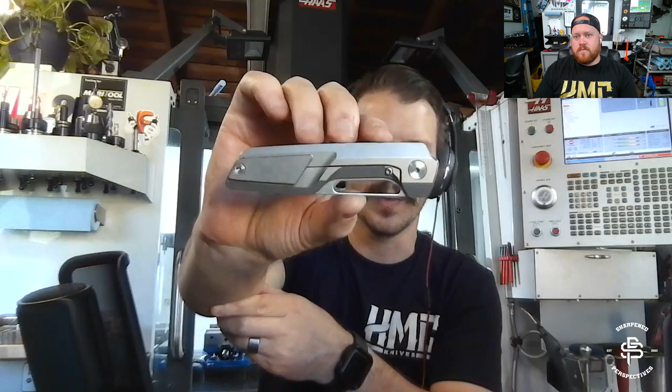Nice, I'm stoked. Yeah, I tried to make it as low profile as possible, but I'm usually wearing jeans, so I tried to leave like an 1/8 inch gap under it, so it's not really spreading on thick pants. So I couldn't get it all the way flush, and it's not contoured at all because I really wanted to make it almost just kind of go away when you look from the side. Obviously you can see that harsh line right there, but most of it just kind of hides.

From each side, it's not super noticeable, but no, it looks sweet, man. I wanted it to be kind of a prominent feature on there. And I've never really been a huge fan of really wide pocket clips, but it's kind of grown on me since I first modeled it. So it's cool. I'm worried that, so I did the inside, the first side of all the pocket clips. I showed you those a while ago.

I did all of the internal stuff on all these. I still need to break them apart, but I ended up putting a chamfer all the way around it. You can see it in the photos that I posted, but I put a nice heavy chamfer around all the edges, so it's real soft. But then I remembered how stiff these pocket clips are, at least on these Bestech ones. So I need to make them really thin. And so now your chamfer's too big on the back, and you're going to have a knife edge between the two? That, or I have to just make a really small edge break on the outside, which isn't a huge deal.

Because it's modeled only at like 10 thou anyways, 10 or 15, so it's pretty small. But when you have this wall thickness right here of only 30, 40 thou, and there's a 15 thou edge break on both sides, you're not going to have that much. So I could relief the center of it and do just a small relief in the middle. I don't want to set up the inside again, but I might need to do that so I can still keep it somewhat thick. Yeah, chamfer everything and then do a relief inside. So it's not all the way through.

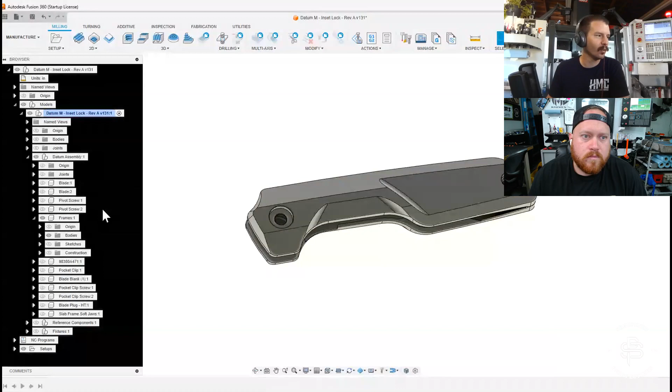See if this opens up. For whatever reason, Fusion, the whole left side, it's completely white. The screen on my end is completely white, but it leaves this big black section on here. And it only is when the text is there, like when the tree's showing. So it's kind of strange, weird.

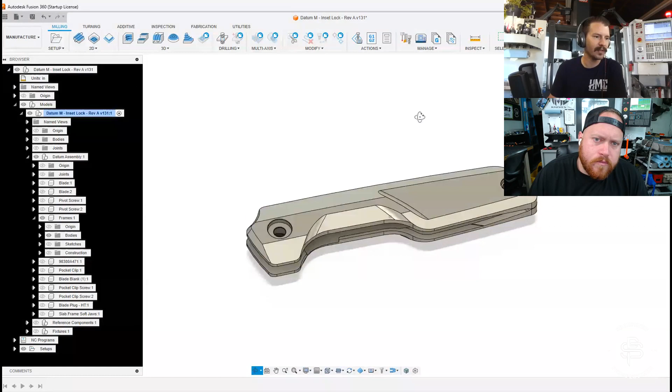Yeah, so I'll just open this up and show this is the top. See some better light. So yeah, the frame design stuff is all done. So I've finished up all of this geometry in here. Getting the pencil toolpath to work on this surface all the way through was a nightmare. So the first one that I ran, I got it to work really well.

And then I restarted Fusion because that authentication shit's going on. So every time my computer goes to sleep, I got to re-log in and everything. And for whatever reason, I had to regenerate all my toolpaths and it wouldn't follow this toolpath. It wouldn't follow this fillet. So I literally spent like 2 hours messing with the damn settings on here.

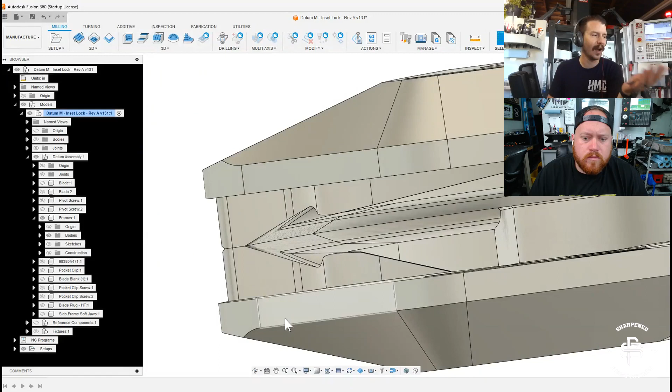With the pencil toolpath, I had to modify the model a little bit. I had to modify all the settings, and I finally got it to work. That wasn't what I wanted. I finally got it to work pretty well, and I have so much going on here. So the pencil, I had to do like a big lead in, lead out. So pencil, I'm trying to think.

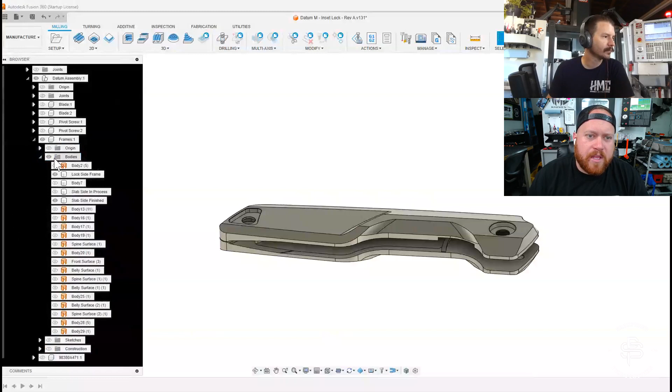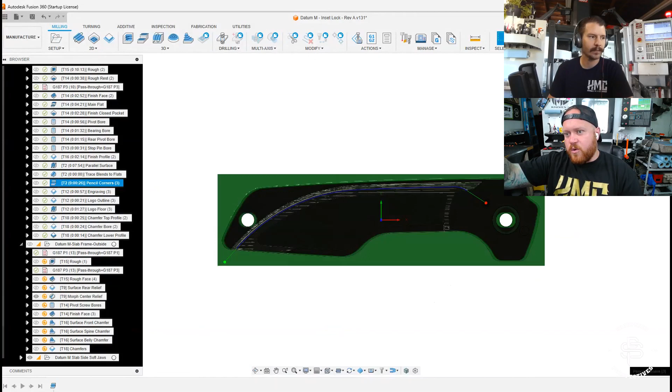For this you're fine, man. Pencil, if I'm thinking about it, I'm assuming that's something similar to what Creo considers a cut line, where it has a 3D surface and you want to surface up and down it, but following the trajectory of that surface around a shape. So it'll start at one end, follow what you're cutting, but step over equally and incrementally around the entire thing that you have selected. Is that how that functions?

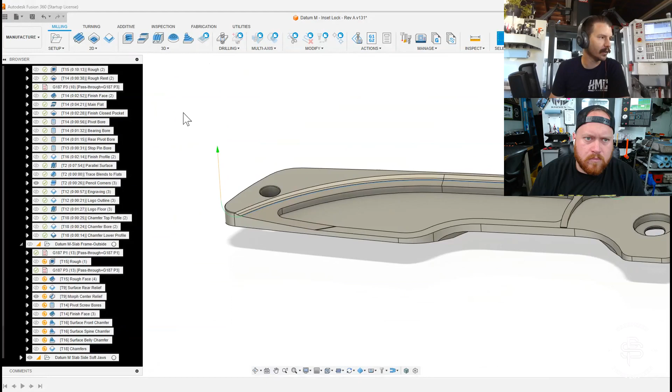Yeah, kind of. So I have this modeled with a 16th radius, and pencil, if you use like an 1/8 ball with the 16th radius, it goes in there and it follows that modeled radius exactly. So before this, I'm doing a parallel toolpath on this to finish everything. The parallel toolpath basically finishes all of this stuff. But when you get to sections like this, where it's going up and down a steeper surface, none of this is steep. There's a waterfall line right there.

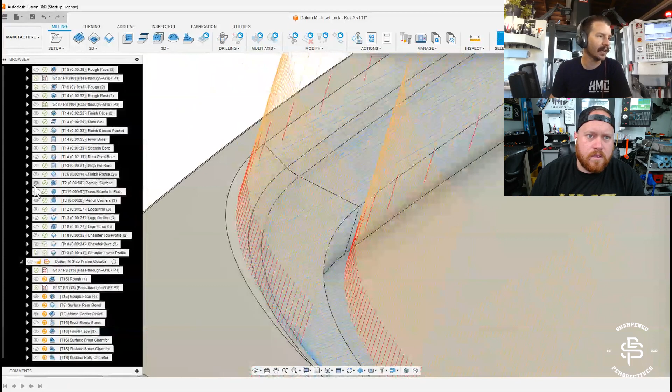You can see. Yeah. So pencil comes back in and it just follows that radius, this blue line. It basically just cuts off all of those little waterfall lines, and you still have all the parallel on the other surfaces, but it breaks up that intersection right there. So it basically just follows right in that corner and cleans and crisps all that feature up. So that's not what I was thinking.

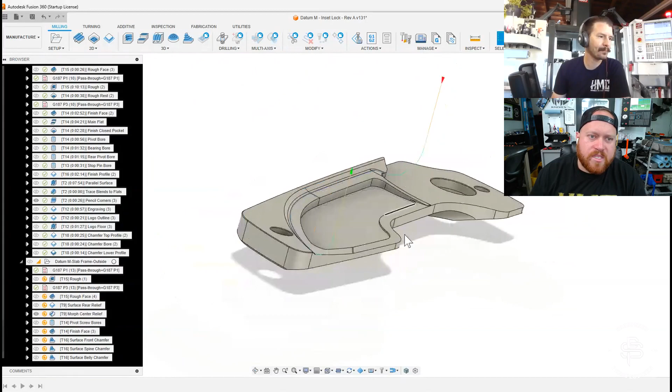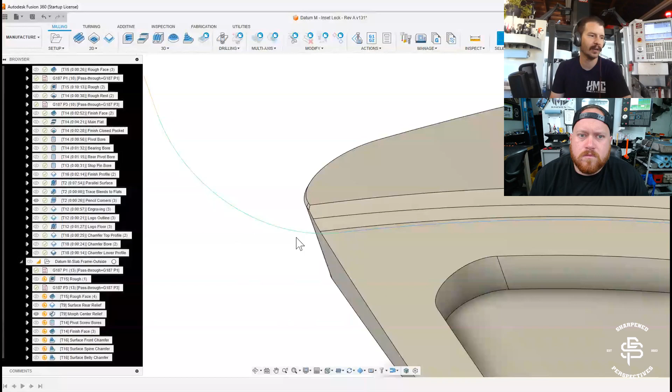Yes, but for whatever reason, it didn't matter how much I changed the model, how much I changed the settings. I don't know the reason why it wouldn't do it. The very first one that I did, it worked perfect. This one didn't. It kept cutting short. So I had to put a big lead out on this to get most of the rest of it right there in that little corner where the green is. So there's like a 250 thou lead out, and it still is kind of missing some of it. Just at the very end. Yeah, you can see there's a little triangle right there.

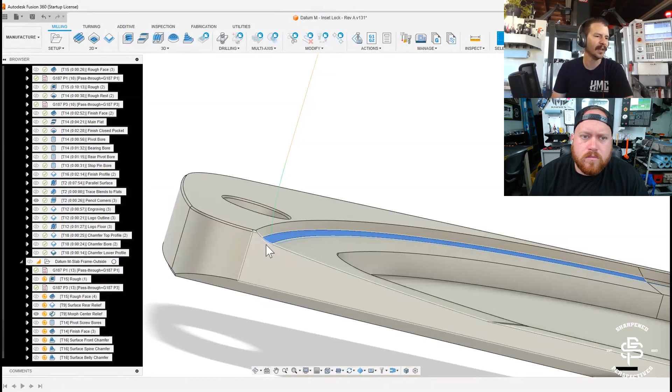Yeah, but the nice thing though too is that this has already been surfaced from the parallel. So it is already getting all that stuff. It just didn't get this specific radius all the way out. But at this scale, the scale is so small, you're never really going to see it, especially once it's all blasted, and it's on the inside too. So I'm obsessing over a lot of these little details that I think most probably aren't going to notice. But again, I kind of want to come out swinging with all this stuff.

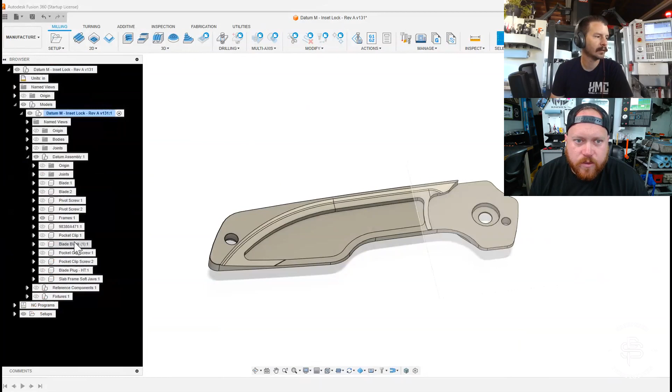100%, man. Yeah, the pencil would be considered a trajectory toolpath for what Creo does. Just follows a contour. It can move up and down in Z while following an XY trajectory. Nice. Yeah, that's efficient for sure. Yeah, it works out well.

And then this is the lock side. Most of these toolpaths are all red because they're from the old models. I killed a lot of the old model stuff.

So this side too, I try to pack as much detail in here. Some of this geometry right here, where this surface comes all the way out on the other side that you could see. I guess I'll just open this thing back up. I keep closing all this to try and minimize some of this stuff. But yeah, if you look inside here, some of this surface comes all the way across. This was a detail that was inside the integral knife.

I don't know how much this is going to zoom in on this. I think it will, but because it's screen sharing, it might prioritize the screen share. But anyways, I'm going to try and bring one of these with me too.

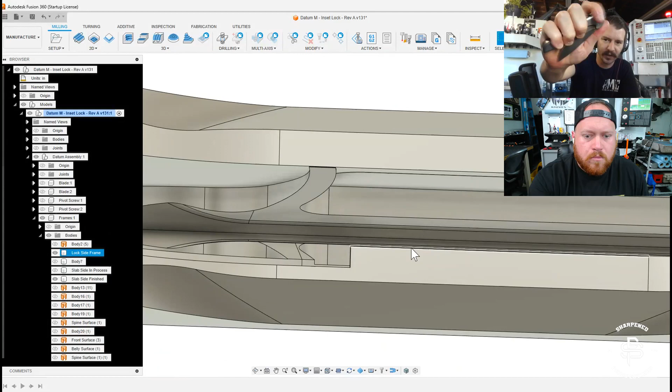This was the original knife that had, where's the camera? That had all of this stuff kind of closed up. This blade wasn't for this frame, so it doesn't actually close all the way yet, but I'm going to try and finish fitting everything. But this was the original integral knife that was TIG welded shut, and it has all of these same features in here. I basically just took this apart and kind of tried to remember how I modeled all this stuff, but there's an integrated over travel stop in this.

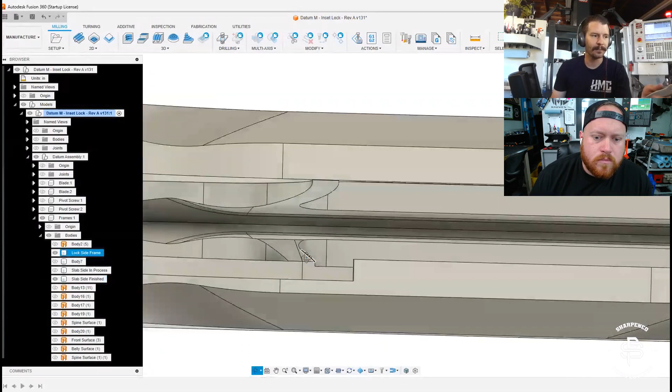Which is actually this surfaced area on the lock side. It comes across, and then once the lock bar is cut through, I key cut the inside of this. So this surface actually overhangs the lock bar, and it's an integrated over travel stop. So obviously you can't bend the lock bar out too far because there's material that's overhanging the lock bar from this surface. Sure.

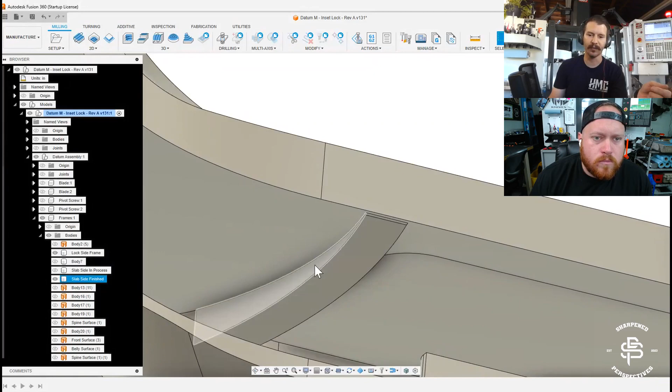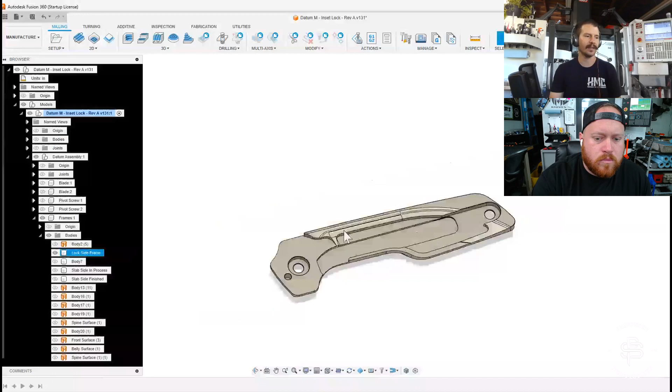But looking inside this knife when it's open, it's kind of a cool feature. It looks nice. So I ended up adding it on here. I got to fine tune this surface a little bit. I just basically threw a big chamfer on there so that it's not just a square corner there. So the lock side is pretty much the pocket. I added this pocket. This whole thing is a mirror from the slab side. I modeled this first, and then I just deleted the lock bar.

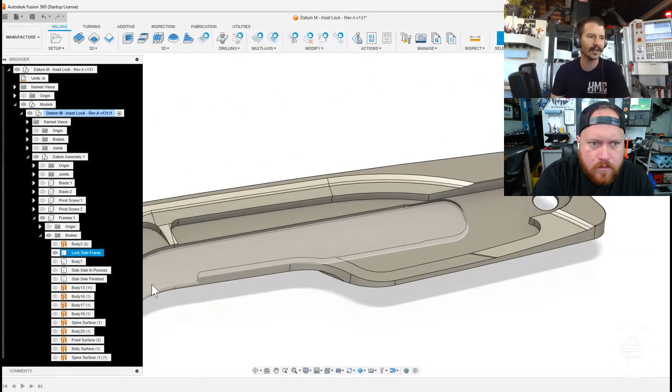So the pivot pin in the back that's going to hold the pocket clip in place, or the pivot barrel, is what's going to hold this lock bar in place. And then location is going to be just tight in this pocket, and then tight in the pocket back here up until about 2.5 inches or so from the end of it, and then it's going to just get 5 or 10 thou thinner. So there's relief all around the rest of it. But I added this little dovetail in here.

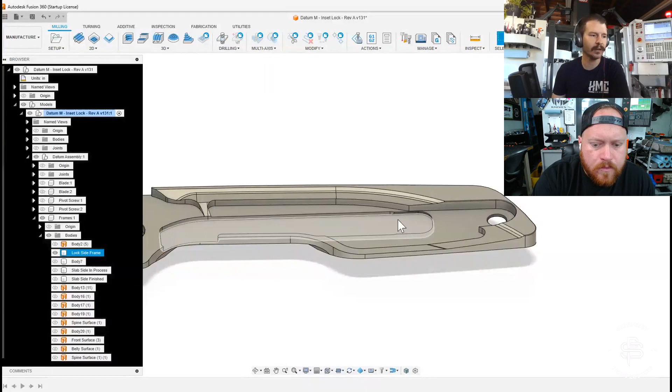Because I was talking about, I need it to actually kind of retain the lock bar where the lock relief is. I think this is going to be too far for that, even though the pressure from the bend and everything is going to be pushing the lock bar down into this pocket. I still want to try and keep it somewhat rigid in there. So I put this dovetail in here.

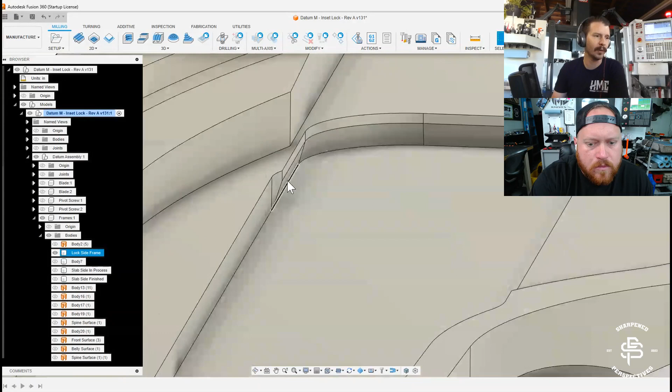I modeled it at 32 degrees included because that's what I have in the mill right now for doing iron sights or backup sights on like Glock slides. And it's the only one that I have that'll fit in here. I want to try to not make it too tight. I know if I made this shallower, it would probably hold it a little bit better than this really steep one. But again, it's what I got in there, and I'm just going to use what I have. I might actually end up just wiping it out if I can't get the lock bar in.

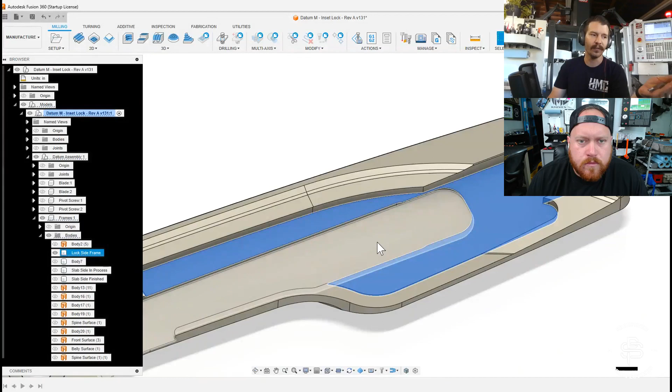So I need to basically install the lock bar by pressing down on it in this area here, where the mouse is, somewhere in this flat area, and then force the lock bar down to where it essentially snaps into this dovetail and then pushes back. So the fit doesn't have to be super tight because it's actually going to spring down away from it. But it should still hold it in place pretty well. And it's at least going to keep it from coming up. So we'll see how it works. I might have to put this back in some jaws and cut it out if I can't get the lock bar in, but that's the plan for now.

I still need to model the actual inset lock, but it also kind of targets the area where you want the bend to be, rather than just letting it bend however it wants from where it's bolted into the knife and retained back where the backspacer is. You've effectively moved the bend point forward probably 3/4 of an inch or something. Yeah, that's exactly what it is, to a more targeted place, like where people like to have that lock.

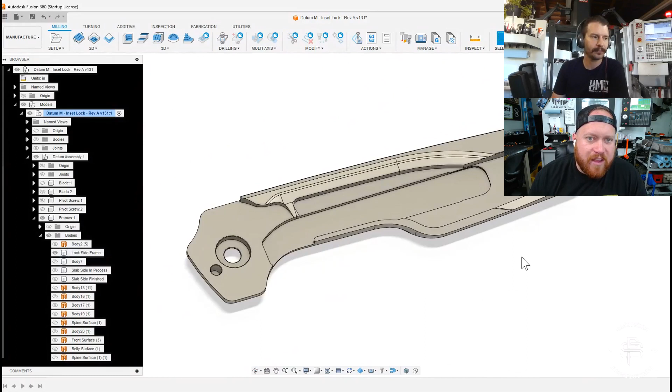I was kind of concerned about that, because if you have that sandwich back there, that's probably like a 3.5-inch lock bar. It's far from where the bend point would be up to the lock. And you never know. I think it would make the lock pretty spongy. You know what I mean? That's what I'd be worried about. Yeah, it's 3.65. Yeah, see, I wasn't too far off on the digital eyeball.

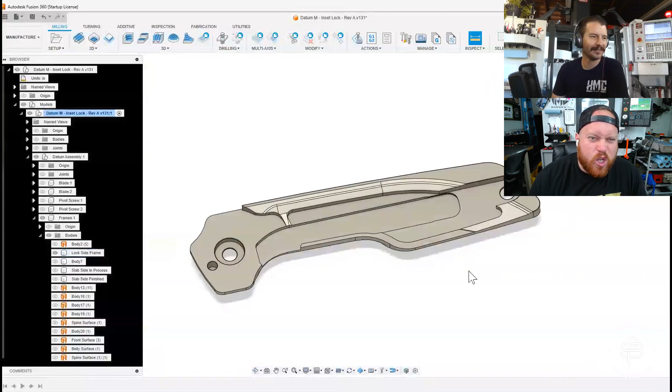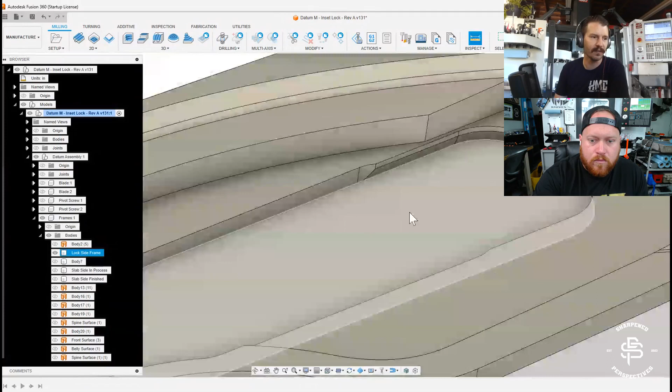But yeah, I think that is a great move. And as long as it's reasonably machinable, I think that'll work really well. This part should be real easy. It's all just from the top, so I'm going to hit it all from the first side, and then the dovetail tool is just going to come in. I just want to make sure the dovetail tool doesn't touch this floor at all, because they usually leave kind of a shitty finish.

This one from AB Tool should actually cut on center, because I cut the dovetails with it and I finished the floor. I'll just have to do a vertical lead in so it doesn't gouge the floor when it plunges. Or I can just run it a thou high and plan for that. So that's the plan for this. That's actually next after I finish doing these.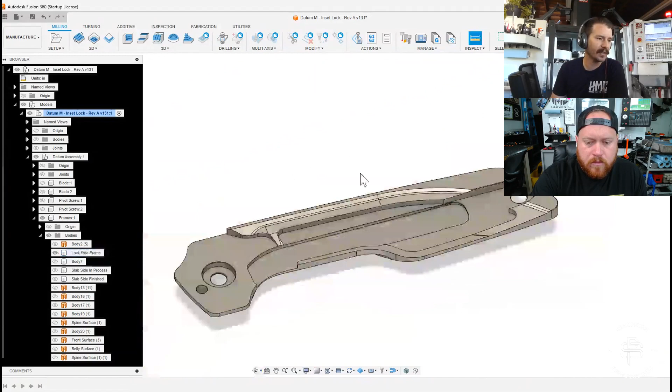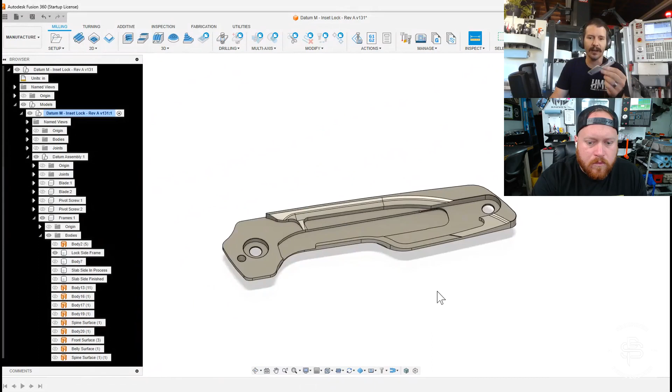I might actually jump to the internal side of this before I even finish all the outside stuff, because I can still sandwich everything together even if I do the blades. But yeah, we'll see. I've got to figure out what I'm going to do next. Since most of this stuff is actually done on the outside, I might just dial in this toolpath today while the mill's running, and then run out all the external stuff while I program the internal stuff. This setup's already done. All these tools are already in. It's the same jaws for the first side, just down on talons. So I'm probably going to do that.

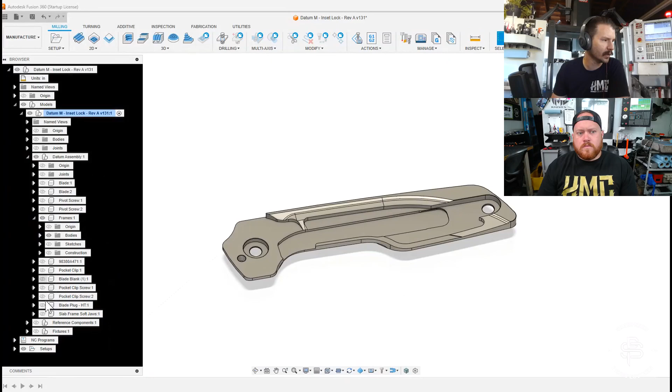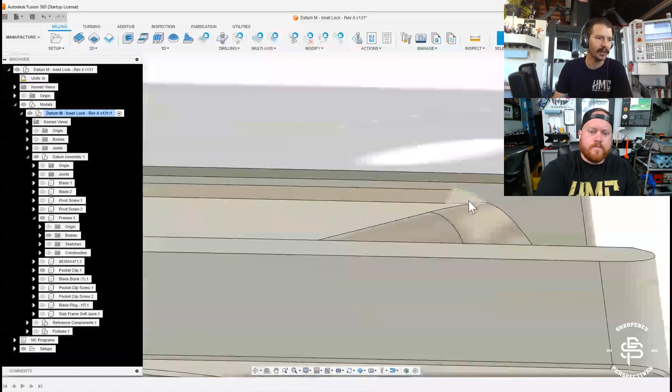We were talking about checking pocket clip stuff. Right now I have this modeled. 40 thou is what it's modeled at right now. So some of my sweeps are gone. It just got rid of some of the sweep in the model. It's supposed to sweep out like this. Luckily, it's already cut. I've got to check and see why. I don't know what's going on. There's stuff in here where I'm literally not even touching it.

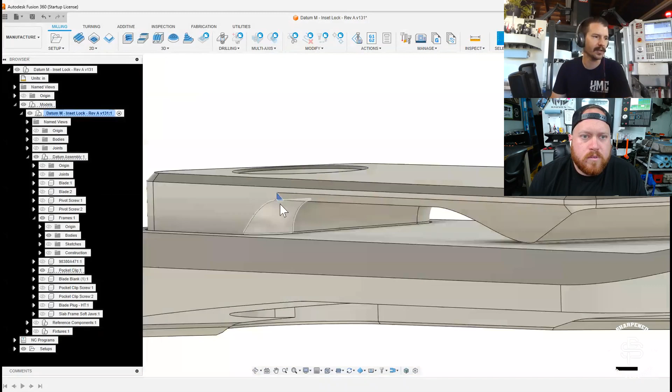There have been so many updates recently where it's crapping out imported models if I bring anything in and it's linked, even though nothing on this is linked. I've got to see why it's doing that. I'm in the manufacturing space, so I won't do anything. But anyways, that's pretty much what it's going to be like. I still need to model the inset lock too.

But yeah, we really only have a little over 2 weeks, because I'm leaving on the 16th at 6:45 in the morning. And I want to try to not be working late out here on the 15th. Don't worry, you will be.

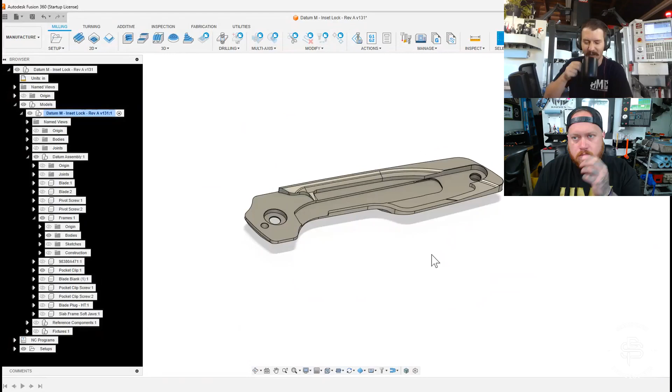I probably will be. My buddy PJ hit me up yesterday. He's like, "Hey, if you want to borrow any of my sharpening stuff, let me know. You don't have to buy any of that right now," because I literally have nothing to sharpen knives right now. All my stuff is dull. The pocket knife I've been carrying since I made it, I've never sharpened it. Jeez. Gotta step into being a real knife maker. Yeah.

So yeah, it's gonna be tight. I think you're figuring out the most complicated aspects now. Better to be doing that on the front end, for sure, rather than trying to solve the world's problems with a day or two to go. Everything else after this is pretty standard. I do think you're probably going to run into some extra effort during your tuning process, with certainty.

Totally. But again, there's no rule saying you have to bring every knife you're making. You know what I mean? If you're able to finish 5 or 6, pay for the trip, come back with 3 or 4 grand in your pocket, and then the following week finish the rest and sell them. Honestly, in some ways I would almost prefer to do that.

Bring 6 with you, sell out, let them hit the world for a week, and then make the rest of them available to the world. That kind of helps drive your demand right now. And it kind of eliminates stress off of you from like, oh, I got to finish 15. I mean, dude, 15 knives is a lot. It's a lot, especially a lot for me.

Yeah, I mean the run that I did for Boost was only like 21. I think I made 21 total or something. The order was for 20, and like that was a lot of shit. That was when Paulo and Bobby and a bunch of people were at the shop, and they were helping out with stuff too. And that wasn't even a deadline. Just sitting there and blasting 15 sets of frames sucks. It sucks. You know what I mean?

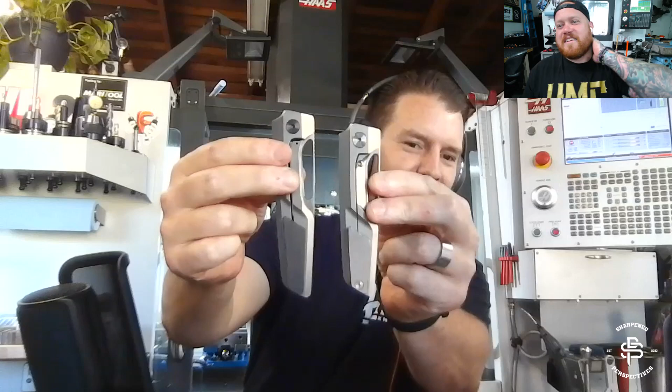People that got those few knives would message me after they received them, like, damn, this son of a bitch is a lot bigger than I expected. Here's the L. And the M, so it's quite a bit bigger. Yeah, dude, I'm excited. I'll bring this one with me too. You really should, man, because then I can take it home with me and I can fix all the stuff that needs fixed on it. No, it's cool. I like it. This thing's cool. So sick, dude. Sweet, man.